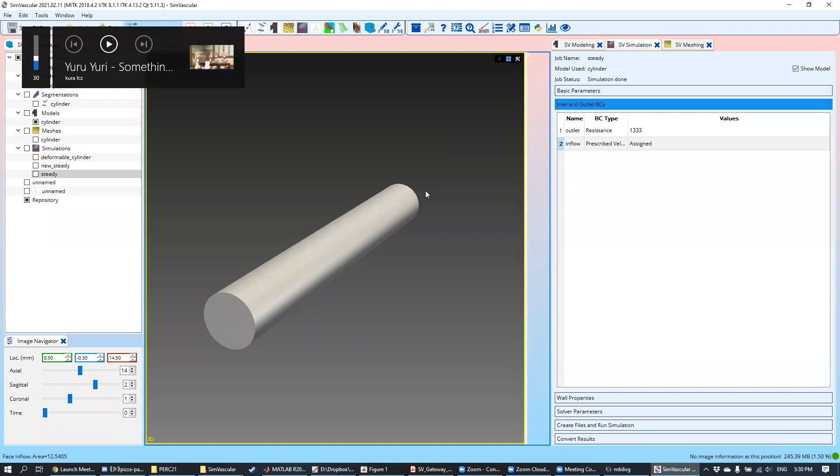Actually, I'll be honest, I didn't have a plan for class today. This last week was meant to just catch up on stuff, maybe have some guest speakers. So we had Adam present on Tuesday, and I apologize again for not recording that session, because Adam talked about a lot of great stuff, but unfortunately, dumb me, I forgot to hit record. So that's my bad. But he did leave us his email, and for those of you who are interested in learning more about what HeartFlow does, hopefully you can reach out to him.

And for those of you who are just coming from 410, the presentation given by Walid and Salman, who work with ANSYS a lot, was awesome. Yeah, that was really cool to see all the different kinds of applications. Yeah, at one point Josh messaged me and asked if you were in 442 when Salman was talking about the stent deployment and stuff like that. So yeah, that was awesome.

Okay. So I did want to mention that I finished grading the midterms, as you probably noticed last night. So those scores are up. I believe the average was around 40 out of 50, so about 80%. So that was good. And the solutions are up on Canvas as well. If you go on the Canvas site, let me show you right now. You go under Files, then Solutions, and you can see the midterm 2 solutions are here. So definitely check those out. Check out the feedback that I gave you, and if I made any mistakes, you can let me know. I'm always happy to look at exams again.

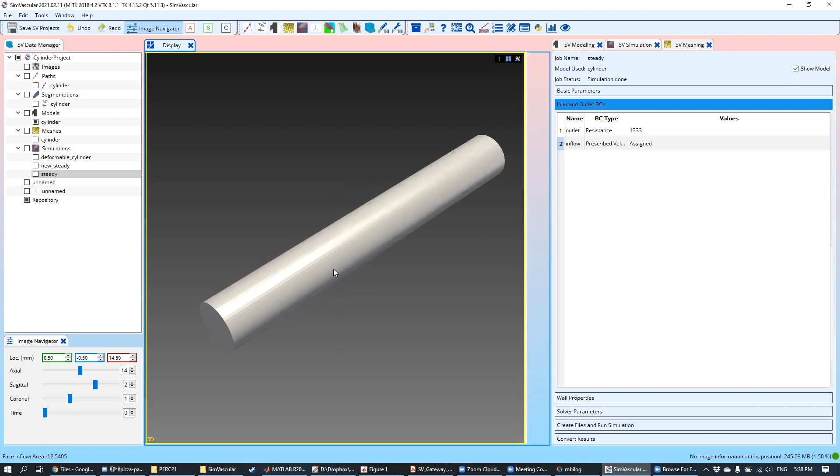Okay, and so a tube is very nice in my world, because it's kind of the simplest geometry that you can do to run a simulation on. And so all the testing and all the code development is usually done on cylinders, because that's kind of the simplest thing that you can do.

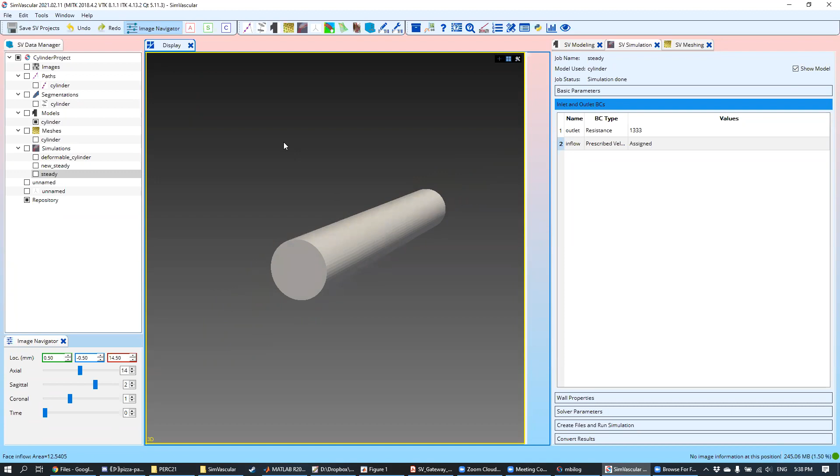Okay. All right. And so let me show you the model here. And you can see here, I have several different simulation jobs done. And so the first one is just a steady simulation. And so this is kind of the vanilla simulation that you guys are all running for your projects. Okay. And so that's all good.

And so the first thing I want to show you guys is how to run an unsteady simulation, okay? Because we've spent a lot of time in this class talking about how blood flow is pulsatile in nature, and so it's unsteady. And so in a lot of senses, the simulation you guys are running for the project doesn't really capture that at all, because you're assuming that basically the flow at your inlet is not changing with time, okay?

And so in your simulations, you can actually do an unsteady simulation where you apply a pulsatile inlet. Okay, and let me show you how to do that. And so it's actually pretty simple. The big thing that you have to change here is how you prescribe the inlet condition. Right? All right, so let's go ahead and take this from the top.

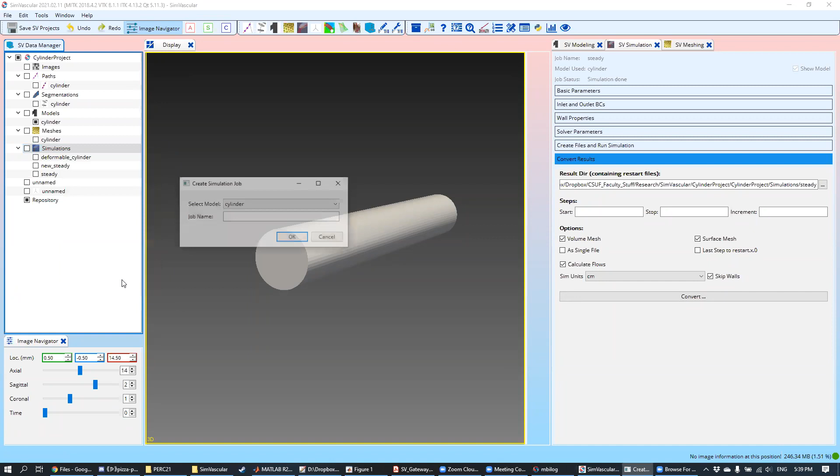And so let me go ahead and create a new simulation job. Okay, and so I'll call this unsteady. And now we're in the simulation framework. All right, and so I'm going to run through a lot of these pretty quickly because I know a lot of you guys have been doing this for your project already. But for basic parameters, we're going to keep all of these the same.

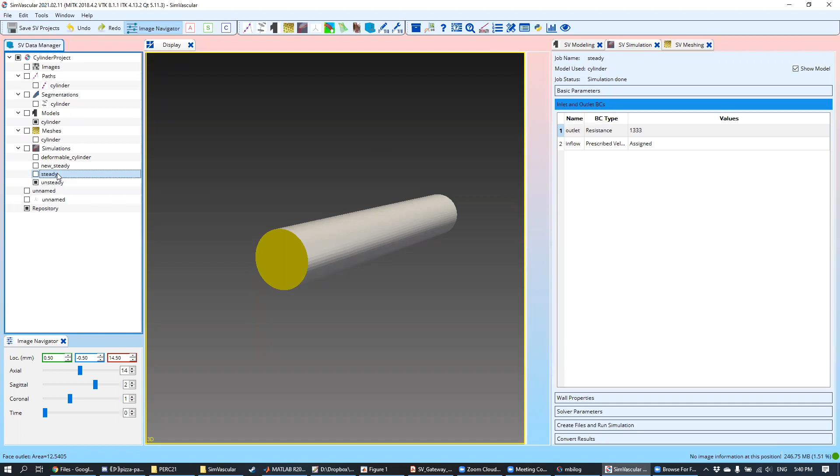Next, we come to the inlet and outlet boundary conditions. For the outlet boundary conditions, I'm going to keep it as a resistance, and I'm going to keep the same resistance value that I have for the steady here. And for the inflow, we're going to have a prescribed velocity. And here's where things change. When setting up your prescribed velocity boundary condition, all of this is the same as before.

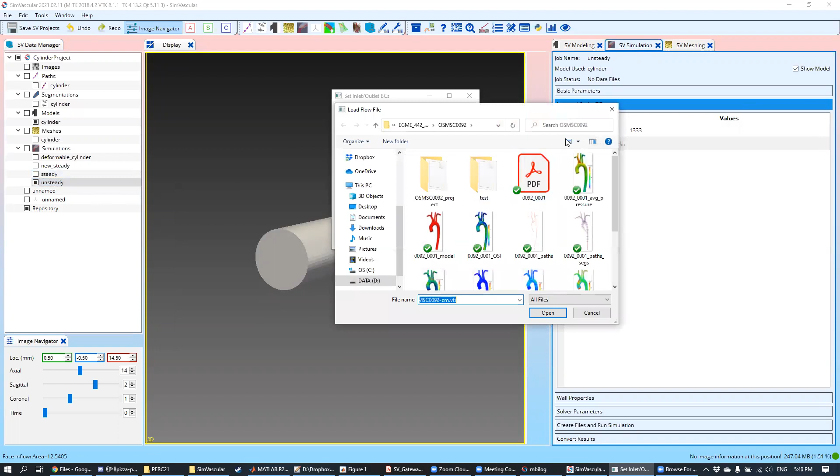And at this point, what I had you guys do was load in a text file called steady.txt, right? And so it might look something like this. Your steady.txt usually has just two entries in it: a time value of 0 and a flow of -100, and then a time value of 1 and a flow value of -100. And so this basically tells the simulation that we want our inflow to be 100 milliliters per second, and we want it to stay that way for the rest of the simulation.

Okay, and so that's fine if you want to run a steady simulation. But what if you want to run an unsteady simulation where the flow actually changes with time? The way that you do that is you apply a different text file here, which describes your flow waveform. This is something that typically you prepare yourself, right? You either obtain a text file like this from someone who's done it before, or more commonly, if you have measurements from inside the patient.

So let's say that you ran an ultrasound, and you were able to get a tracing of their flow over time, then you can apply this as their boundary condition as well. Okay. And so to show you what this looks like, because right now we're just looking at two lists of numbers, let me copy this into a spreadsheet so you can see.

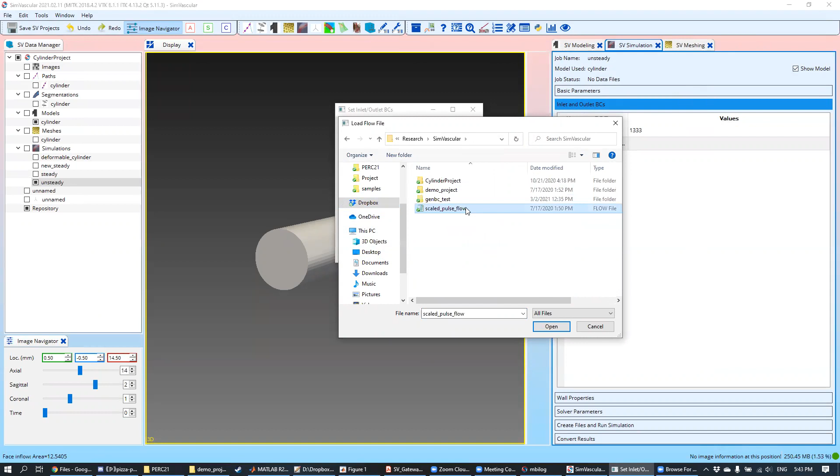Let me navigate to that. All right, and then here we've loaded in that file. And now we can put in a period as well. The period here is usually set to be whatever the last time step in your flow file is, so usually that's set automatically, but you can change that if you want.

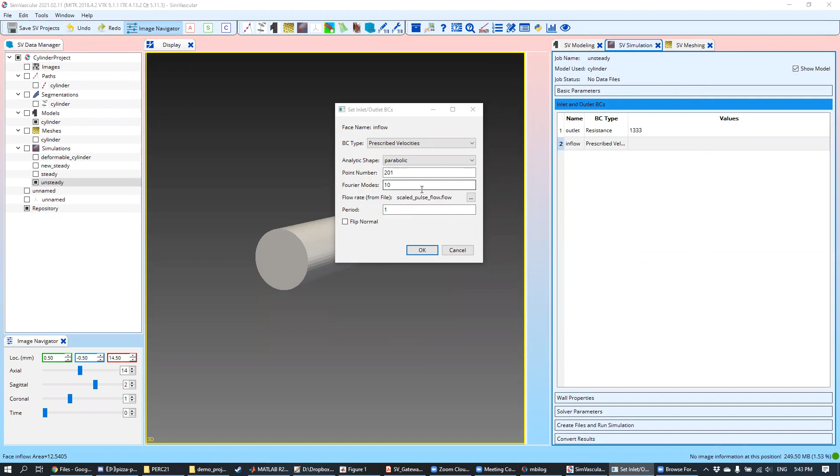Question: so is that what the periodic time reference in the data sheets is for? Yes, and so probably in your data sheets you had references for what the heart rate was, or what the period of the heart cycle is, and that's what this is. That's basically how long it takes for that waveform to repeat itself.

And so here I have a generic one that I showed you. The generic one just has a period of 1, which is not bad, because a period of 1 basically means your heart is beating 60 times per minute, and that's relatively healthy, but it's realistic. It is possible for people to have a heart rate of 60 beats per minute. In fact, if that's your resting heartbeat, then you're probably in pretty decent shape.

All right. At this point, we can explain what some of these other parameters do, because when we first ran our SimVascular tutorial for simulations, we just glazed over these. I said just leave them alone and don't touch it, right? But now we can actually see what they're used for. So let's first talk about the Fourier modes.

If you remember, a few weeks ago we talked about the Womersley solution, right? And from there, we did a little bit of a review of the Fourier series. Remember what the Fourier series says is that you can take any periodic waveform and replicate it with the sum of sines and cosines, right? And that sum there is an infinite sum.

So you have an infinite sum of infinitely many sines and cosines, and with that you can replicate any waveform, right? But realistically, you're not going to have time to do an infinite summation of terms. So usually we truncate this, or we cut it off at some frequency.

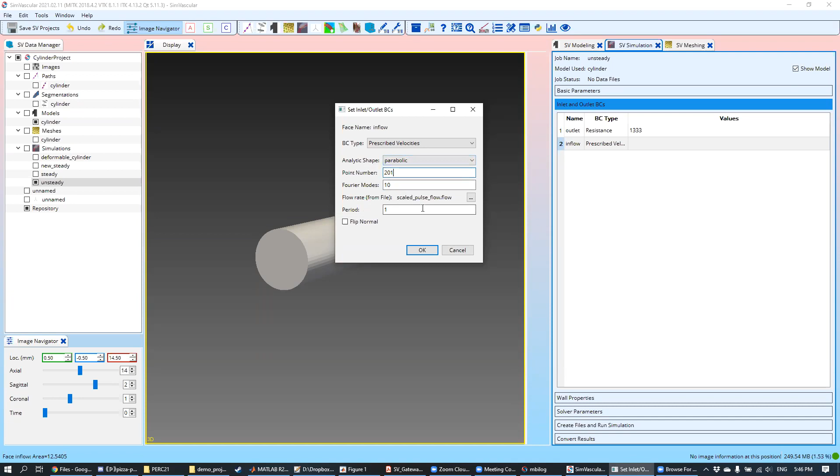Because a lot of times, if we look at this file again, it's a little bit hard to tell from here, but what we have is basically 1,000 data points in between time 0 and time 1. A lot of times that's a little bit of overkill in how many time points you need to actually simulate the job.

We call this subsampling, so we only take a subset of the samples in order to reconstruct our waveform. This number basically specifies that, and usually 200 is plenty, and it usually gives you pretty good accuracy too. All right, so that's the main difference for pulsatile, at least for setting the boundary conditions. There's a few more things that we have to change, but are there any questions at this point?

Okay, let's go ahead and hit OK. So now our inlet profile was prescribed. For the wall properties, we're going to keep it as rigid, so that's not going to change. Now let's go to the solver parameters. Here's probably where the main difference is.

When you run an unsteady simulation like this, the flow rate is going to go up and down and up and down like that. So here, when you select the number of time steps, this is a lot more important than your steady simulations. In your steady simulations, I basically just have you run this for 100 time steps. For steady, that's fine, because all we want to do is simulate until we reach steady state.

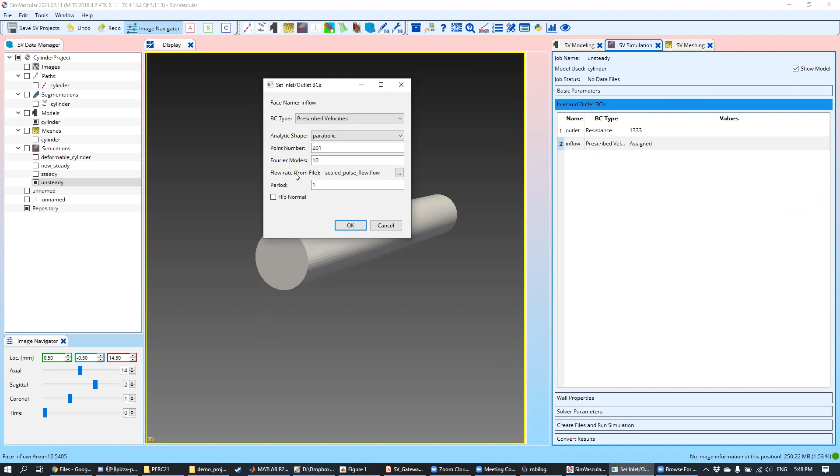If we go back to the inlet and outlet boundary conditions, we know that our inlet waveform has a time period of 1, so it takes 1 second for that waveform to fully do its thing. At the very least, we want to simulate that entire cycle; we don't want to cut the simulation off early. Let's say we do our typical thing where we set the time step size to 1 millisecond and only simulate for 100 time steps. Then we're only simulating 0.1 seconds.

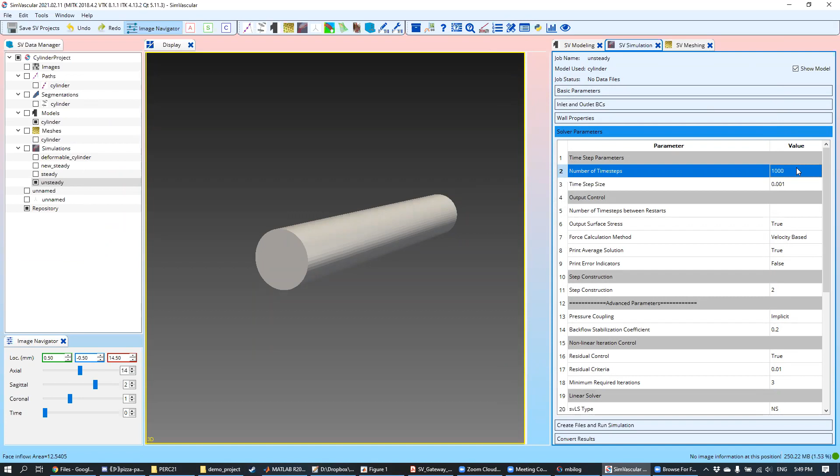If we go back to our flow waveform, this means we're only simulating it up to here, for these time steps. All of these times here we never simulate, just because we cut off the simulation too soon. So you want to specify a number of time steps that's at least 1 cycle, because otherwise you're going to miss everything else. For this case, we want to simulate for at least 1 second, so we need 1,000 time steps and a time step size of 0.001.

But it goes beyond that. Getting one cycle is the bare minimum. What can happen sometimes in these simulations is that it takes several cycles for the simulation to kind of, what I call, warm up. Because before we start the simulation, we're basically starting from rest, so all the fluid inside this tube is not moving, and then all of a sudden we're applying this pulsatile waveform to it.

And so it takes a while for the inertia inside the tube to kind of realize what's going on. You can imagine that at the beginning, all the fluid in here is just chilling, and then all of a sudden it's asked to move up and down.

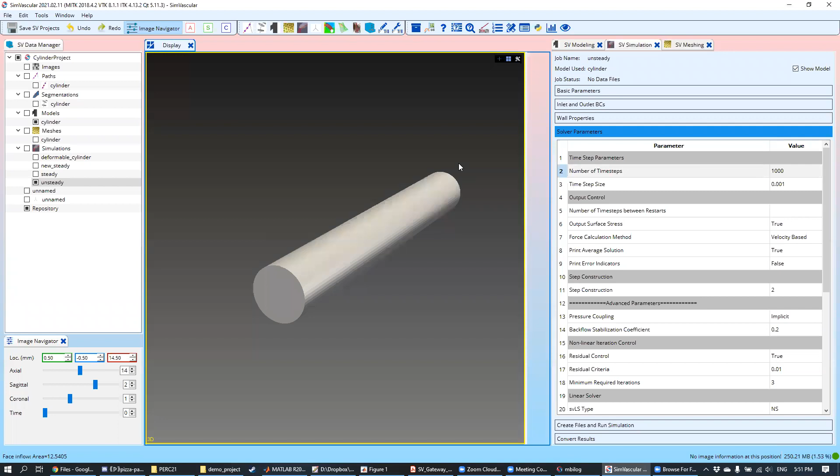And so it'd be kind of the same thing where, if you're sitting in your computer chair and then the Kool-Aid man busts through your door and asks you to do the Soulja Boy thing, right? It's gonna take you a few choruses to get used to it, just to get over the shock of the Kool-Aid man jumping through your wall. And so for simulations, it's kind of the same thing. Usually we need to simulate this for more than one cycle in order for it to get used to the oscillation.

Okay. And so this is definitely more of a rule of thumb thing. Everyone has their own number for the amount of cycles that they do, but I like 4. So I like to simulate at least 4 cycles for rigid walls in order for it to reach its desired state. You can think of it as the first 3 cycles are used to warm up, and by the 4th cycle it's usually good, and then you can trust the results.

Okay. And then from those 4 cycles, you would only take the results from the last one. So you throw out the results from the first 3 cycles, and you only get the results from the 4th one.

Okay. And so from there, let's specify the number of time steps between restarts. Remember, this is how often we're going to save. We have to be a little bit careful with this, because since now we're solving for 4,000 time steps, we don't want to print results every single time step. So for this one, I'm going to save every 50 time steps. That gives us a pretty good time resolution, but it also doesn't fill up our hard drive.

All right. And so for step construction, I'm going to do a few more modifications. These are all the ones that we've done before. Oh, one more thing. Okay, so that's all the modifications that we've made before. Just because we're unsteady, these don't really change that much at all, so we can use the same thing.

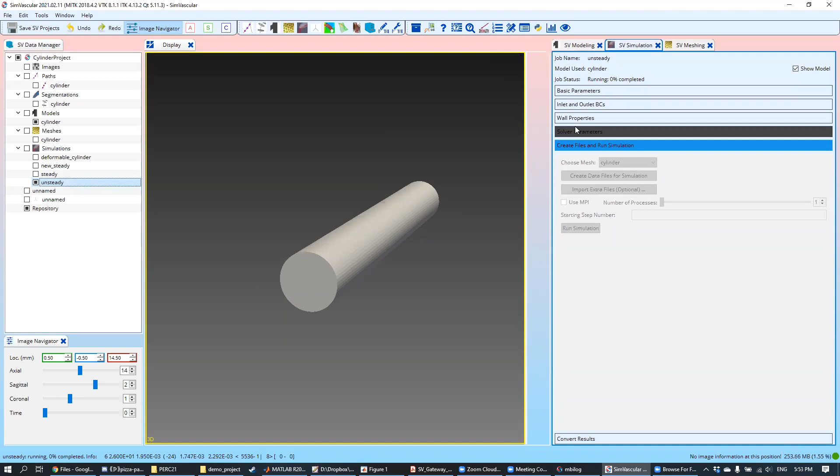All right, and so that's going to take a little bit of time, so let's see, what can we do until then? I have so many regrets. I shouldn't have done 4,000. I should have just done 1,000 for this. Okay, let's do that. Let me go ahead and save.

Actually, let's see how busy the cluster is. Let me go ahead and run a simulation there. At the rate it's going, it's not even 1% done. All right, so let me go ahead and load all this stuff. I think we're in cylinder project, right? Yes. Simulations, unsteady. Okay, so we have to load in geombc.dat. Look how quickly these load in because this mesh is so coarse. Normally you don't want to do this; this is probably too small to run on the cluster, but it's okay. I'm an admin, so I know what I'm doing.

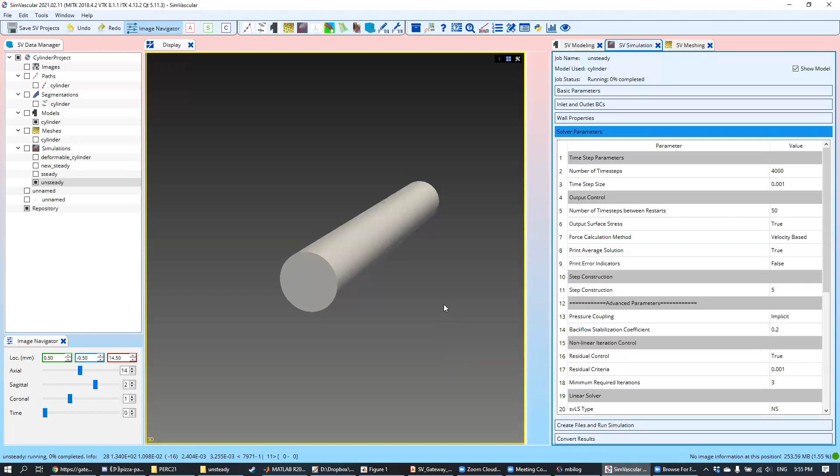Okay. All right, and so we're going to run here on 24 cores. Let me bump this up a little bit, so I'm going to do 48. All right, and so we'll go save and launch. Let me stop this actually. Let me go ahead and move this again.

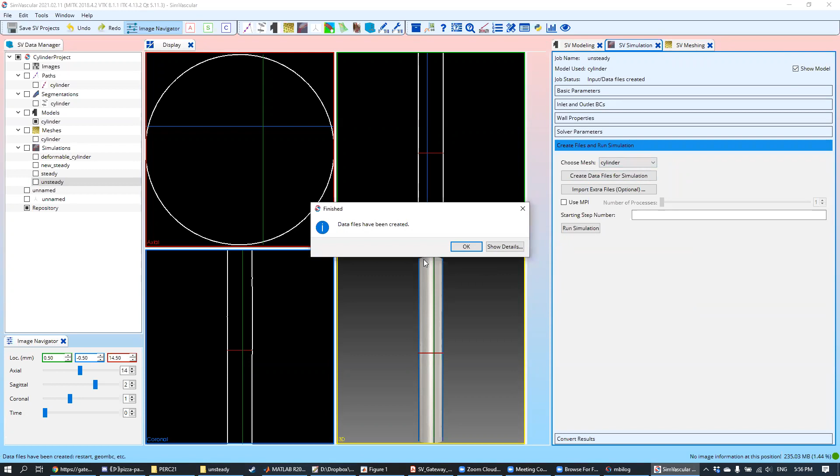All right, so let me change this a little bit. Instead of 4,000, let me set this to 1,000. And then I'm going to relax some of these tolerances a little bit just so that they run a little bit faster. Okay, so go ahead and create these data files. Let me just double check that the changes went through. Okay, great. So now let's go ahead and run the simulation. All right, now we're rolling.

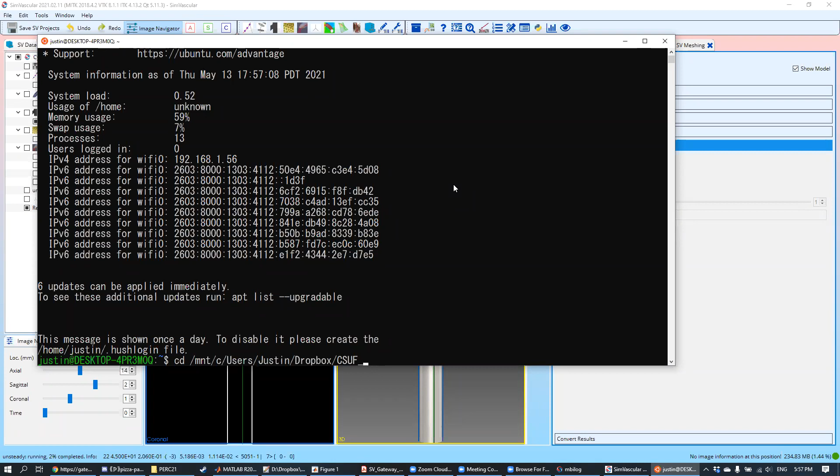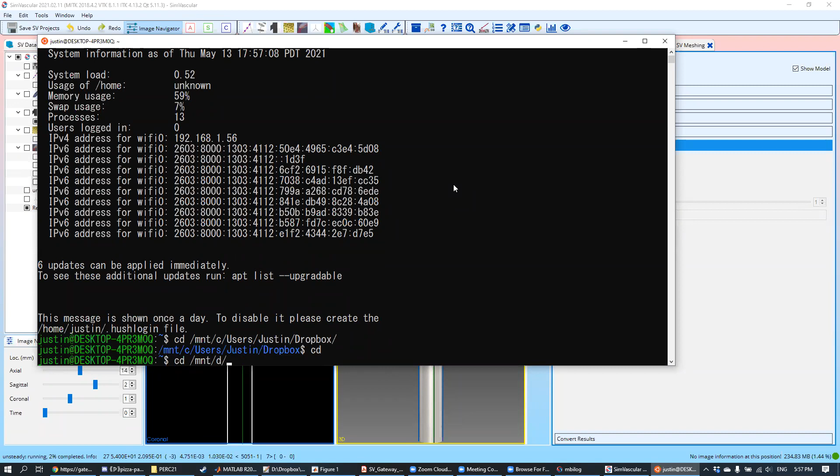So if you're running the simulation on your desktop, you can check in the bottom left right here for how the simulation is going. And in fact, let me do this. Let me navigate to that folder in Ubuntu, and we can view the simulation as it's going. Where is this actually? Let me see. Dropbox. Got it.

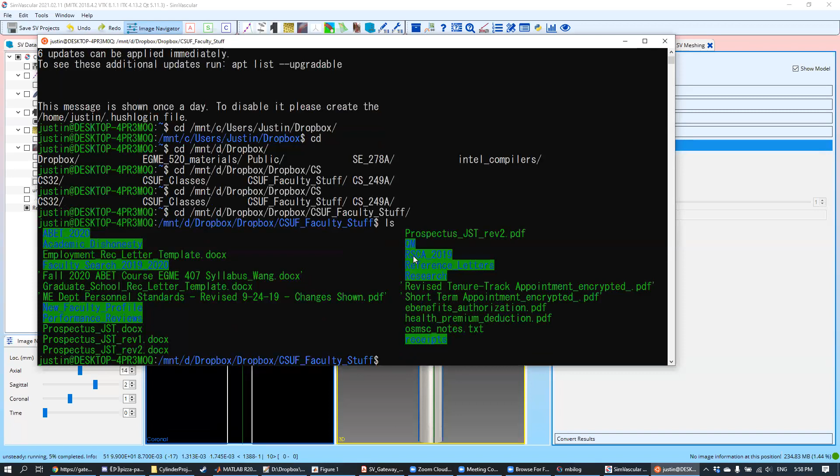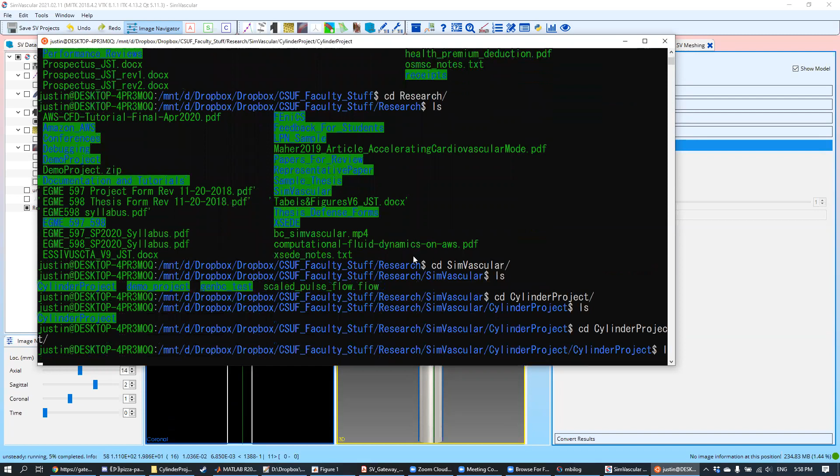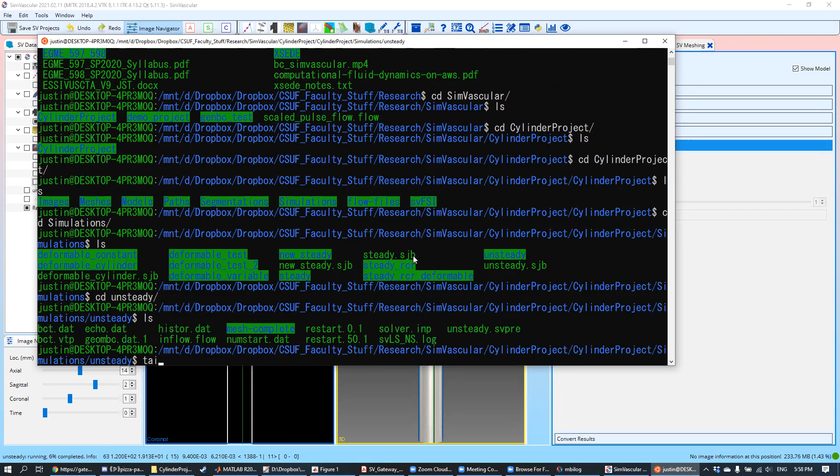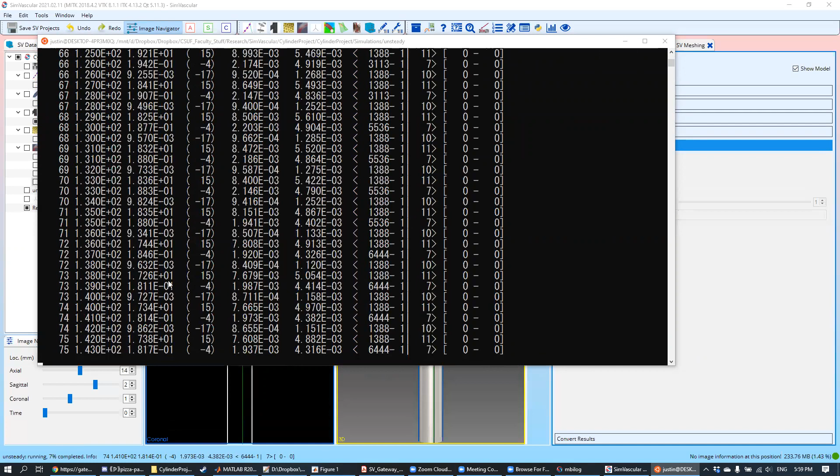Okay. All right, and so we're here. If you want to see how things are going, you just do this. It does, but you can't do this with the GUI, right? So what I'm doing here is I navigate to this folder, and now I'm monitoring the simulation results here. I think that'll still take a little bit of time to complete.

So let's talk about deformable wall simulation, because I think that's the part that's actually really cool. If we go back to our normal simulation parameters here, one part that we've always glazed over is the wall properties. Everything we've done up to this point has been using rigid walls. For rigid walls, we basically assume that the walls are made of iron or something like that, and they don't move.

But we know very well in this class that that's not realistic. In the cardiovascular system, the vessel walls are flexible, because that's what allows us to have wave propagation. So by running a rigid wall simulation, we're making a big approximation by not accounting for that. SimVascular does allow you to run with deformable walls, and in fact, it has 2 different modes. But running a deformable wall simulation takes a little bit of extra stuff that we never did before.

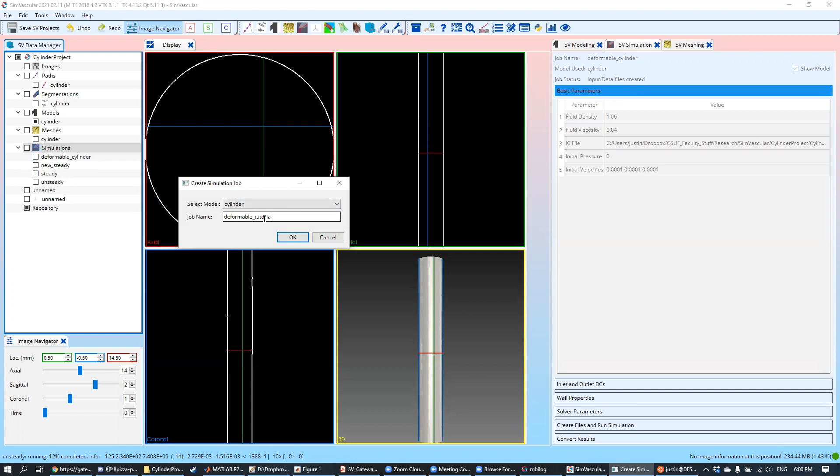So let's go ahead and start a job from scratch, and I'll show you how this is done. Let's create a simulation job. I'm going to call this deformable tutorial. Here we're going to learn how to do our deformable wall simulation. The first thing we have to do is utilize this first tab for basic parameters, and in particular, we have to specify something for the IC file. The IC here stands for initial condition.

What that's going to do is provide an initialization for the velocity and the pressure field inside the vessel. Normally, we didn't use this for our rigid wall simulation. For a rigid wall simulation, we assumed that all the velocities and all the pressures inside our model initially start at 0. So you're starting from 0 velocity, 0 pressure, basically completely at rest.

The thing with deformable wall simulations is you're getting into this realm of computational techniques called multiphysics. What that means is that you're simulating multiple different types of physics or different types of equations at the same time. Rigid wall is really nice because the only equation that you have to solve there is Navier-Stokes, the equations for fluid flow.

If you have deformable wall, suddenly you add this structural mechanics component, because not only do you have to solve for the fluid inside your blood vessels, but you also have to simulate the structural response of the wall in response to the fluids. So you have this coupling between a fluid mechanics solver and a solid mechanics solver at the same time. I won't get into the details of all the multiphysics stuff because that gets really crazy. But just know that it's not a simple matter of just adding one physics to the other.

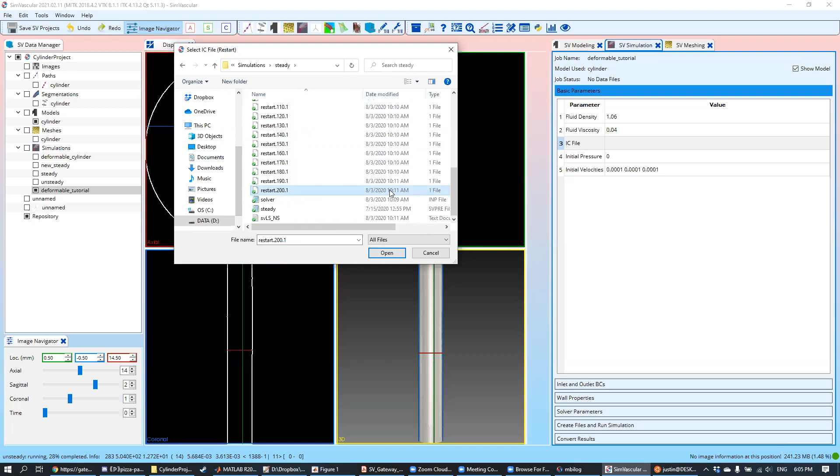And so to run a deformable wall, the first thing you have to load in here is this IC file. I think the best way to load it in is to just double click here. And what you actually need to load is your restart file from a previous rigid simulation. So here, let me go to steady. This is a simulation that I ran a long time ago. You need to take the restart file, and you can see here the restart files for all my results. Then you're just going to select the last one. Here the last one is 200, so I'm going to select that, and that's going to be my initial conditions.

Right, okay. But if you're running your simulation on the cluster, you have to be a little bit careful here. I'm not sure if you guys have peeked into that zip file that comes back from the cluster, but those restart files, there's not just one. You actually get dozens and dozens of them. The reason is that when you run your simulations on the supercomputer, you're running on multiple different processors at the same time, maybe 48 or 96 processors in parallel.

And the way that all those processors write results is that each individual core or processor is going to write its own output file. So for any given time step, let's say time step 100, you're going to have 96 different results for that one time step, because we have 96 processors running different parts of the domain at the same time. So before you load in this initial condition file from the cluster, you have to combine all of those together into one. And the way that you do that is you do convert results. If you remember from before, we've skipped over this option here to put the last step as restart.x.0.

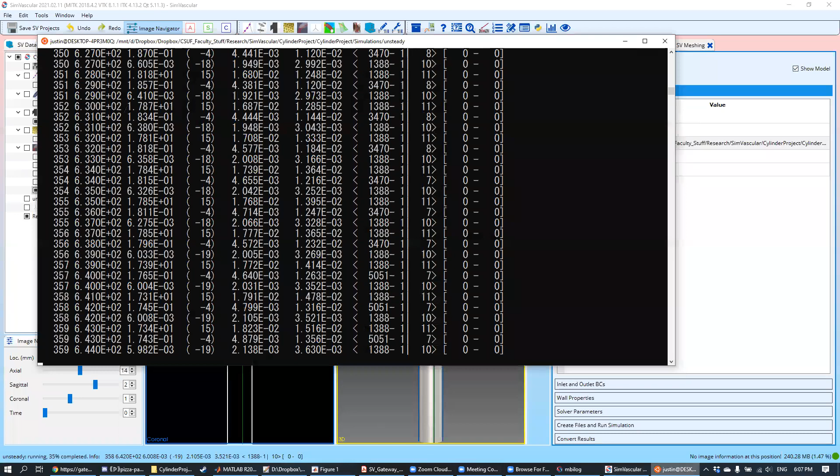Okay. Any questions on this so far? Let's see how this is doing. Okay, 360, not bad.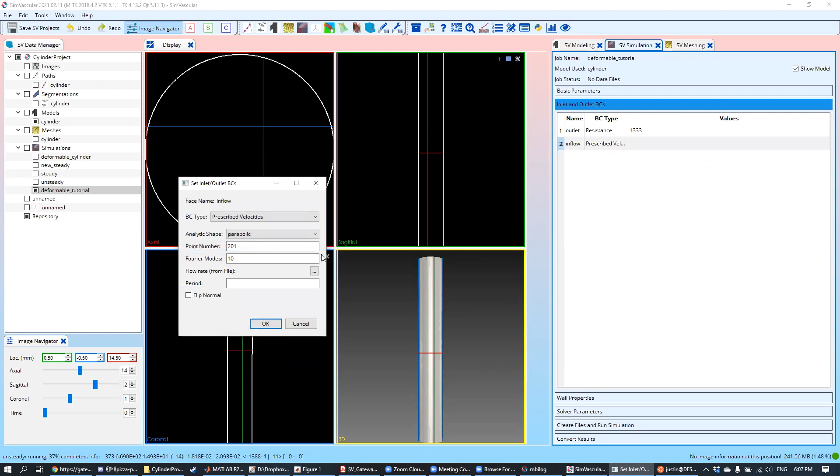All right, so that's the initial condition file, and that's really important for deformable wall simulation. So make sure that you specify that. For the inlet and outlet boundary conditions, we're not going to do too much different, so I'm going to assume the same things. But what's important for deformable wall is that you need to run with unsteady conditions. I guess that's kind of a lie. You can run it with the steady simulation. It's just that you won't see anything. It'll just be really boring, right?

Because the fun thing about deformable wall is the pressure wave propagation, right? In order to get pressure waves, you need to have pressures in there that are changing with time. If you have a pressure that pulses, that pulse is going to travel down the length of your vessel. But if you have a steady case, you don't have any pressure pulses. Everything just stays the same, right?

So for a steady simulation under deformable conditions, you'll probably see your vessel inflate a little bit, and then it'll just stay there. It'll be super boring, and nothing will really happen. So in order to actually see wave propagation and really get the benefit from deformable walls, you need to run with unsteady boundary conditions, okay?

And so now we come to the big part. Now that we're running deformable wall, we can change these rigid wall properties to deformable. You can see there's two different versions of this, but I'm going to run the easier version first, because it's a lot easier to explain. As soon as we change this option from rigid to deformable, we have a lot more options available to us. These are some additional parameters that you have to set for your deformable wall simulation.

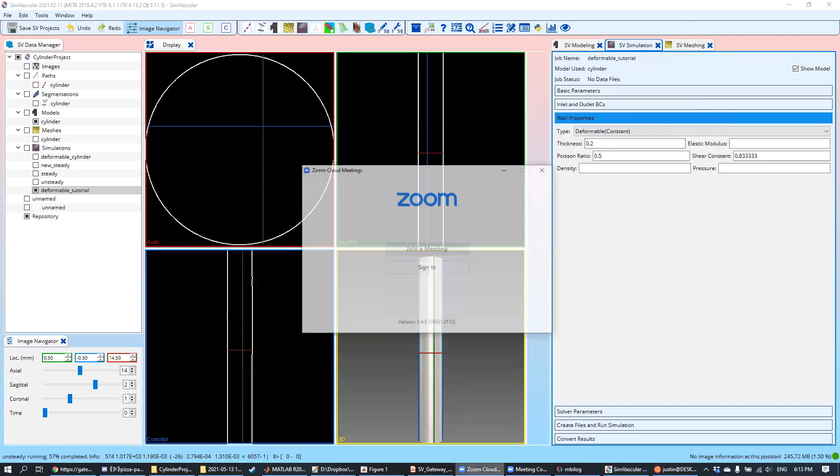So any questions on this? Okay. All right.

So that's the thickness. Now we have the elastic modulus, which is basically the same as the Young's modulus for your vessel. Just like the thickness, this is something you'd have to look up in the literature. Unfortunately, there's no rule of thumb for this. The thickness we found based on the radius of the vessel, but the elastic modulus takes people actually going in and measuring the elastic modulus of tissue. So this one you'd have to look up.

The elastic modulus depends on what area of the body you're in. The elastic modulus of your aorta is going to be different than that of your vein, which is going to be different than that of your microcirculation. So you really need to do some research about what area of the body you're doing, and what elastic modulus you should specify for that area.

For this one, I forgot what I put, so I'm going to cheat and go over here. I can see that I've applied an elastic modulus of 0.4 megapascal. But the units here are important. Just like all units, they're going to be in dyne per centimeter squared, so you need to make sure you put in the right units. For this case, I have a Young's modulus of 0.4 megapascal.

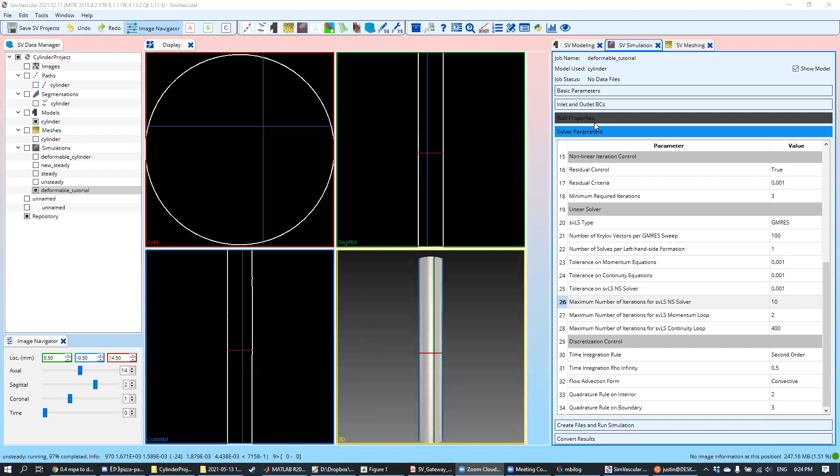All right, so can I go back and explain how you obtain a value for the density again? Yeah, definitely. For the density, I just use a value of 1 here. The main reason is that water is the main chemical constituent inside blood vessel walls, so your blood vessel walls have a very similar density to water. So we usually apply a density of 1 gram per centimeter cubed. Right, so density of water in grams per milliliter. Yep, the density of water is 1 gram per milliliter, and that's the density we apply there.

Yep. Yeah, a lot of things on this earth are made of water, and so it's convenient because if you know the properties of water, you know the properties of a lot of different things.

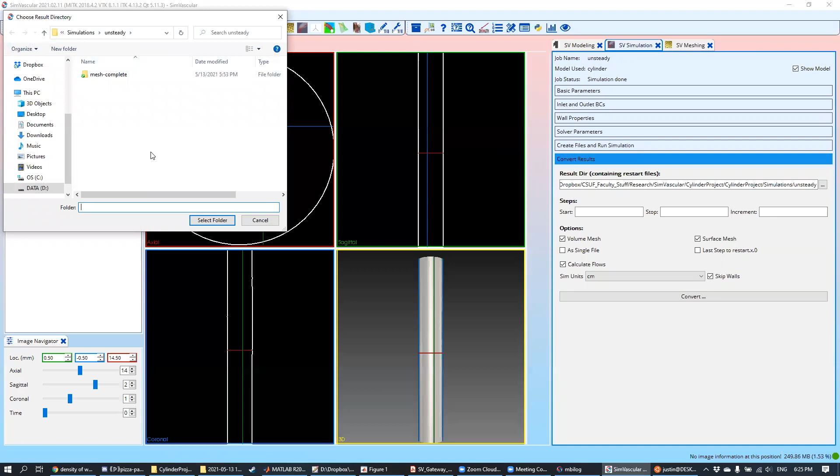Okay, and so our unsteady simulation is done, so let me go ahead and show you those results, and I'll show you the initialization of the deformable wall simulation, and then we'll call it a day. Okay. All right, so we're done with the unsteady simulation, and now we're ready to convert the results. Just like you've done, you need to select the folder where all the restart files are located, okay?

All right, and so where's this? Unsteady, okay? You can see here that this unsteady folder is where all the restarts are. So I'm gonna select this folder. It was already kind of selected by default. And so I'm gonna say 1000. We're going to start at time step 0, stop at time step 1000, and our increment here is 50. Okay. So let's go ahead and convert.

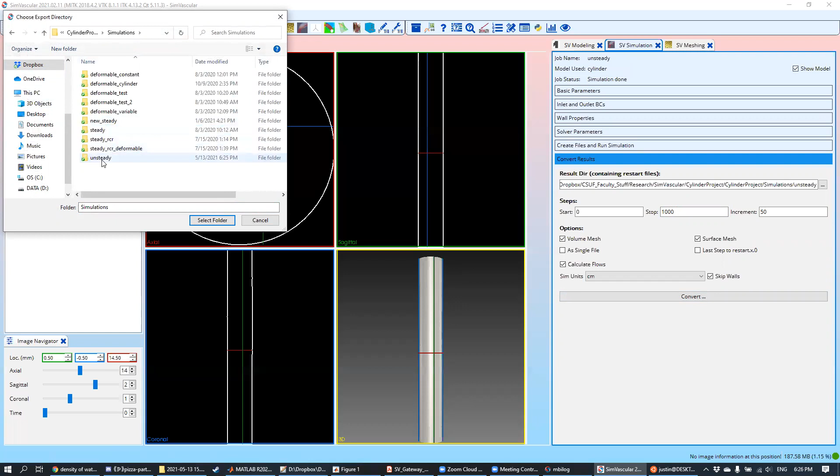All right. So let me go ahead and save this. Oops, totally in the wrong folder. Okay. So let me go ahead and here. All right, so it's converting the results. SimVascular says it's not responding, but I know better than that. Okay, and then it's done. All right, so let's go ahead and go into that folder so we can view the results.

Let's see, right here. All right, so let me load in the VTU file. Well, actually, I need to load the stack. The thing is, when you're loading in an unsteady simulation, you need to load in the entire stack of results. When you convert the results, you're gonna create a list of different VTU and VTP files. So let me go ahead and load in the whole stack.

Okay. What we're viewing here is the initial conditions. You can see that we're starting with basically 0 pressure all throughout, and our velocity is also 0. But as soon as I go to the next time step, you can see that the velocity changes. Now we have a maximum velocity of 30. And then the pressure looks like this. So let me go ahead and normalize this.

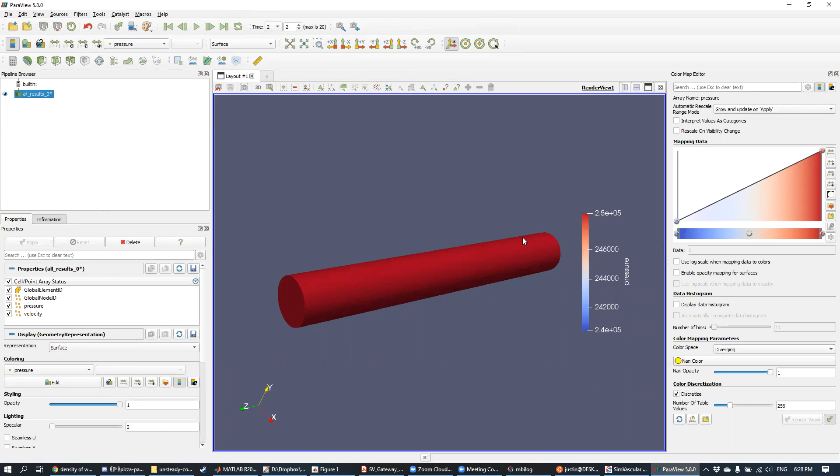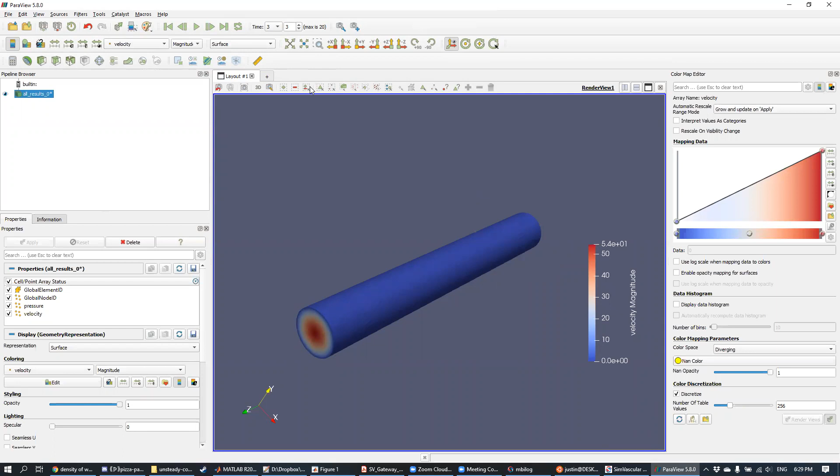If I rescale this, you can see that the maximum pressure goes up to 3.9 times 10 to the 5th. And if we check the velocity, our max velocity has gone up from 30 to 47. So the solution is changing with time, because we supplied an unsteady inflow. Once again, we can advance forward in time, and you can see that the velocity went up to 54, and the pressure went up to 4.4 times 10 to the 5th.

These are looking a little bit scuffed because this mesh is actually pretty coarse. And you can actually play this forward. It's a little bit hard to see, and you can make a video too in ParaView if you want. But at every time that we saved, our solutions are changing because we have an unsteady simulation. And so with that, you're going to be able to simulate more realistic things. Oh, and I forgot, I didn't save the wall shear stress, but that's okay. So that's unsteady simulations.

If you want to run an unsteady simulation for your project, just let me know. I can send you this flow file, and then you can run that for your project. But just keep in mind that unsteady simulations take a bit longer than steady ones, so be prepared for that. Okay. So any questions on these unsteady simulation results?

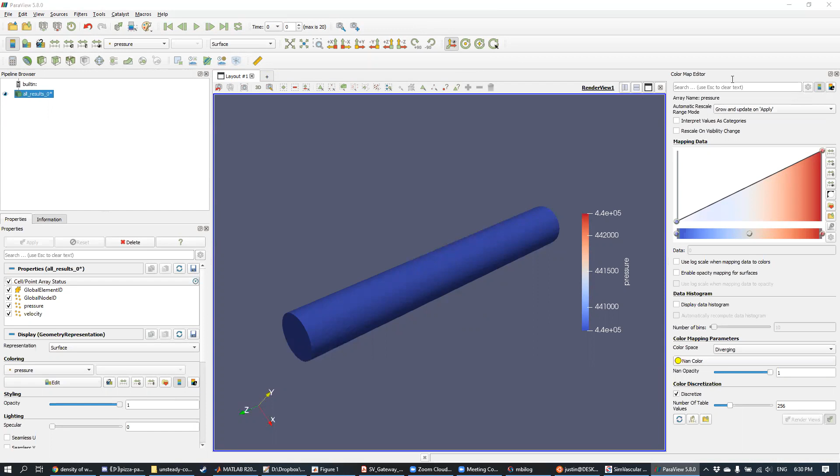Okay. All right. So last thing, let's go ahead and initialize the deformable wall simulation, and I'll show you one extra thing that gets output. We're here on the deformable wall, and all of our settings are here. We have the wall properties, we have the solver parameters, and now we're ready to create the files. So I'm gonna go ahead and click Create Files.

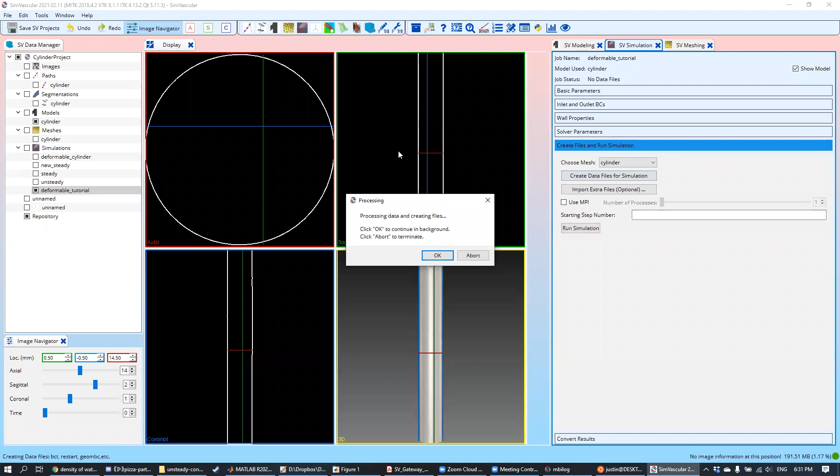What you'll typically notice for deformable wall is that it usually takes a lot longer to create the simulation files. But because this mesh is so coarse, it didn't really have any issues. Let me go to that folder. This folder is called Deformable Tutorial. Here you can see we have all of our usual simulation files: BCT, geombc, restart, solver, numstart, inflow, all that stuff.

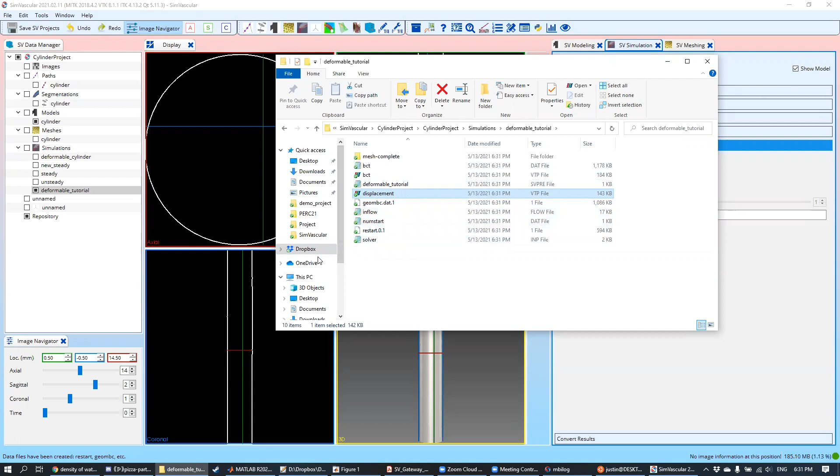But we have one extra file here that never showed up before. This file is called displacement, and it will show you the initial displacement of the vessel walls. Let me double click this and load it into ParaView. Here we have our cylinder. If we look at the displacement, we have an initial displacement of about half a centimeter, so 0.52. This is the initial inflation that we have in the vessel.

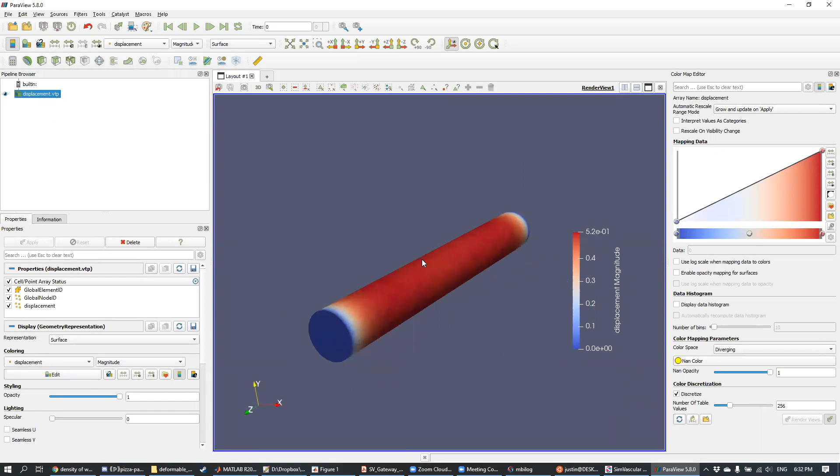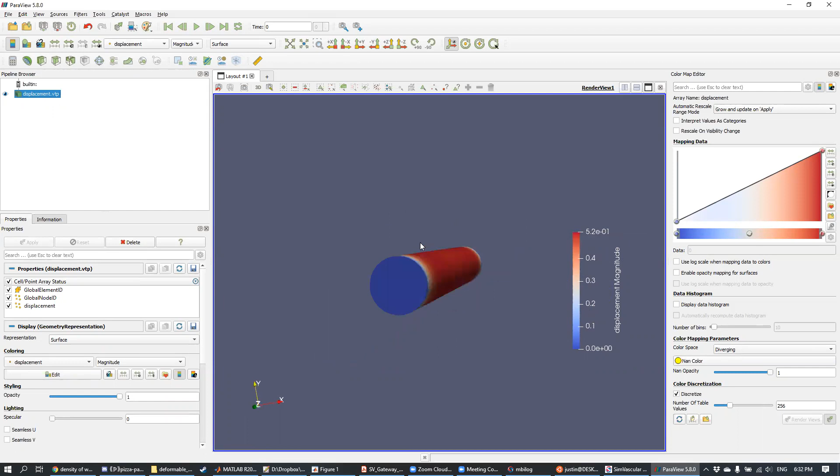What basically happened here was that SimVascular took your results from the steady simulation, most notably the pressure, and applied that pressure onto every single wall node. From there, it computed how much this vessel was going to inflate as a result of having that internal pressure. You can see the inflation is about half a centimeter. If you want to view visually how the vessel is deforming, you can use this filter inside ParaView.

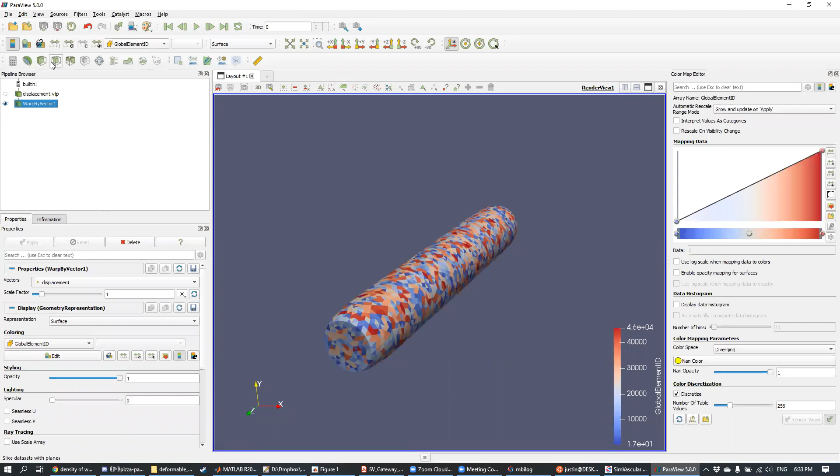We have a filter here called Warp by Vector. What this does is warp your model according to a vector quantity, and our vector quantity here is displacement. Let me hit apply, and color this again by displacement. You can see here that our vessel is inflated a little bit.

It kind of looks like what I feel like after I go to Korean barbecue. I just feel really stuffed.

If we compare this model to the base one, you can see the model is inflating, and that's a result of the deformable wall. Because of the deformable wall, we have this inflation of the vessel wall, and it can now flexibly move according to how the pressure changes inside the vessel. Actually, this is the exact result you would get if you ran a steady simulation with a deformable wall model. Your model is going to inflate, and then it's just going to stay like this. That's kind of super boring.

What you really want is for pressure pulses to travel along the length of this vessel. You want one part of the vessel deforming more and other parts deforming less, and to actually be able to visually see what the pressure pulse looks like.

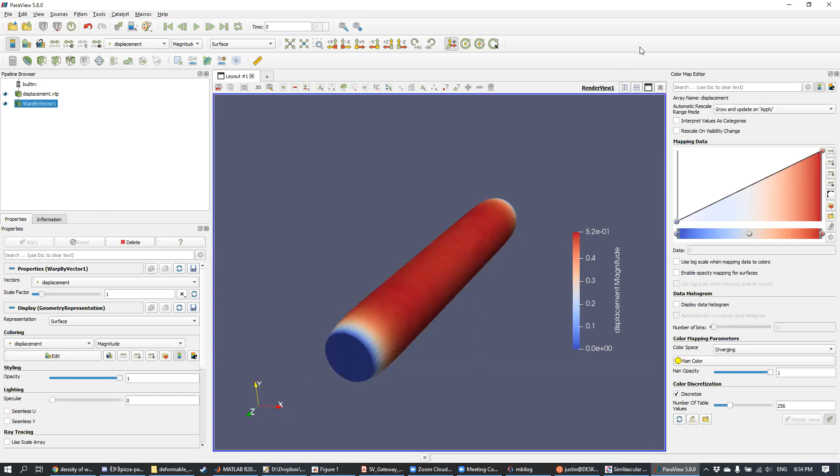Actually, I do have an animation I can show you for what it looks like. Let me go up. Did not want to do that. Remove from quick access. Okay, I do have a video or an animation of it. I think it was from last year, from 417. So let me do this.

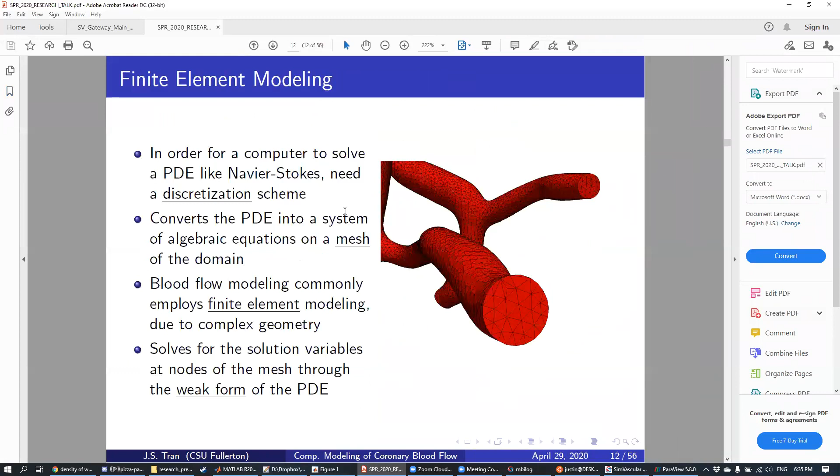Because once you have this deformable wall inside your simulation, now you can actually model this pulse wave propagation, right? So besides the vibe and stuff, you can actually see the pulse wave go down, reflect, and reflect back and forth. And so this is one of the really cool things that you can do with CFD. All right. Any final questions on any of this?

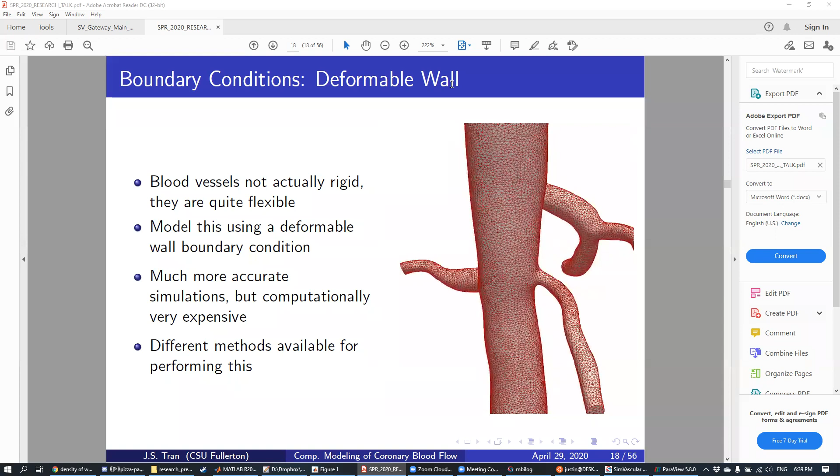How'd you guys do? You guys did great. You guys did really, really well. Yeah, I'm really happy. Yeah, I'm happy to be a reference for you guys. Definitely put me down. Thanks, guys. Professor? Yep. First off,